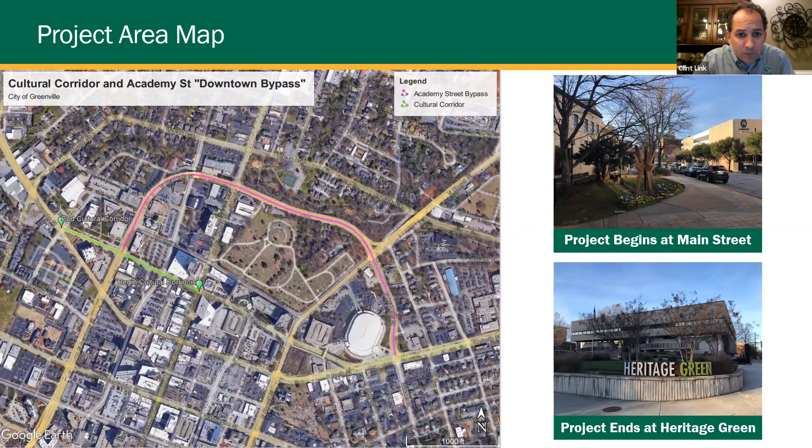So there's existing 4 lanes of travel out there right now. You can see sidewalks are pretty narrow, especially for a central business district - very narrow, very close to the road. There's not a lot of separation from the road to where the pedestrian realm is. There's no bike lanes on this - we don't have any accommodations for cyclists. That's totally unlike what you see on Main Street and some of the other streets in our CBD.

So we're looking to really enhance that pedestrian environment by doing some traffic calming, narrowing of the travel lanes, and reduction of a travel lane through a large part of this to create better separation. That's what we're going to show you tonight - where we are with the plans and how we're proposing to do some of this. So with that, I'm going to turn it over to Brett Helsel with HDR, and he's going to begin walking you through the preliminary plans for the project. Thank you again.

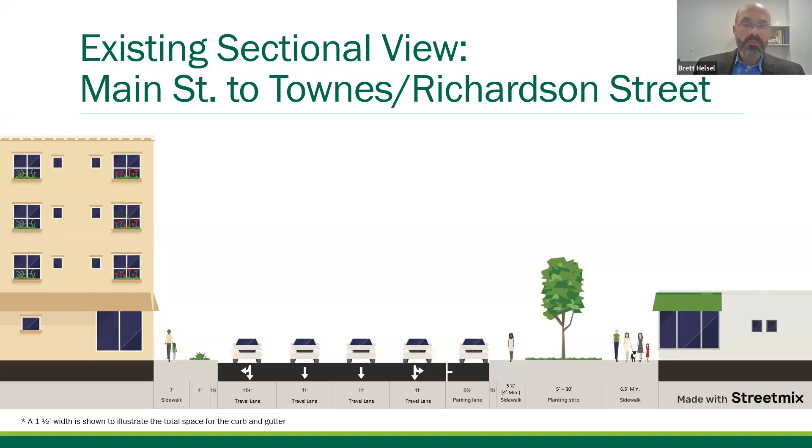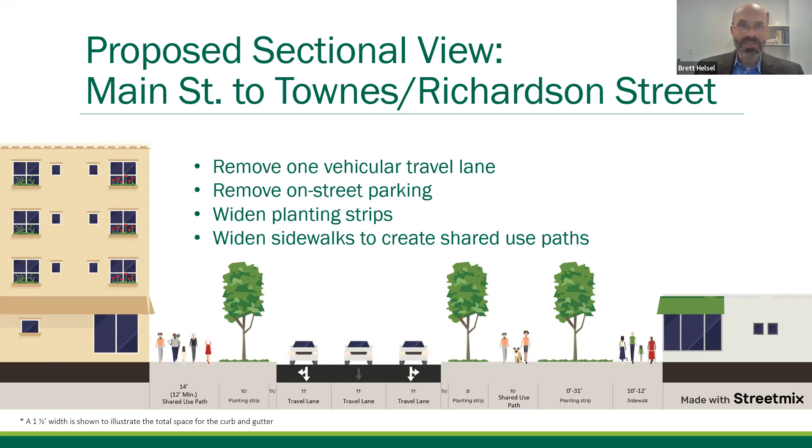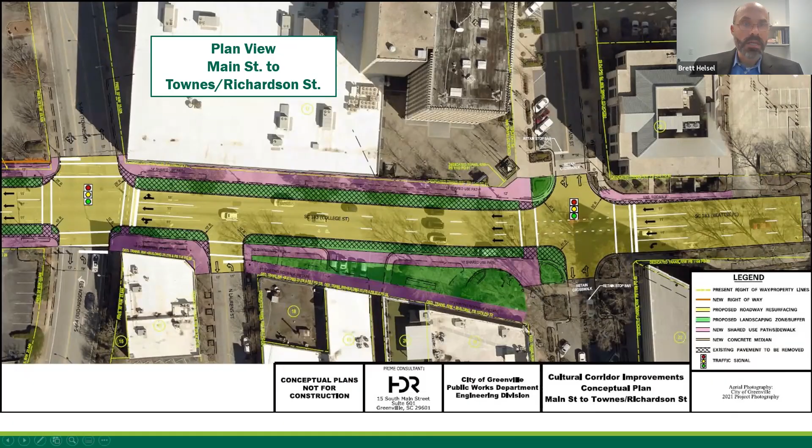So that covers the first block from Main Street to Richardson and Townes Street. I'm going to walk through the next block, from Townes Street to Academy Street. On this block we currently have a 4-lane section with a lot of extra pavement width—13-foot wide lanes, which is excessive for what this road needs in a downtown core like this. So we're going to reallocate some of that space to provide more room for pedestrians, bicyclists, and landscaping. There are sidewalks on this stretch today, but they're quite narrow and insufficient for the use needed on this corridor to promote walking and biking.

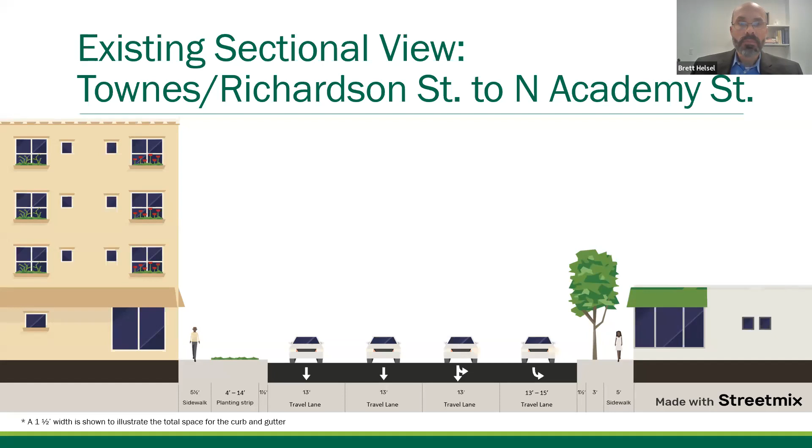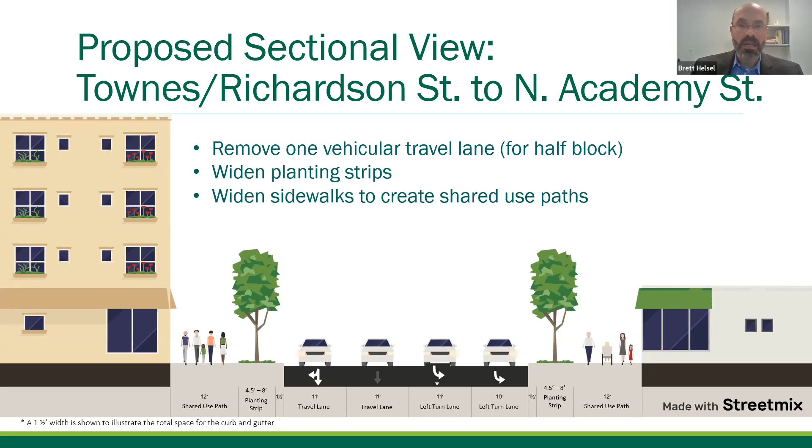The next slide will show you how we plan to convert this section. We would reduce those travel lanes down to 11 feet. For half of this block you'll have 3 lanes, and we'll pick up a 4th lane to add a left turn onto Academy Street. This has been generated due to the high traffic demand for left-turning vehicles coming downtown and needing to get onto Academy Street to go south. We're also looking at widening, providing a 12-foot wide shared use path on both sides of the street, as well as a nice planting strip and buffer. The next slide will show you what that looks like in aerial view.

Clint also mentioned some alternatives that we're going to present, which I'll do in a moment, but I wanted to share that this slide shows 4 lanes approaching Academy Street. Both of those alternatives are going to require 4 lanes. We've been coordinating that with the State Department of Transportation. We've looked at the traffic analysis, and the volumes there are pretty heavy, using that as both a through and a left turn movement onto Academy Street. This kind of shows you what that would look like—you'd have much wider sidewalks as you come up to Academy Street. I'll talk more about the actual intersection and what's being proposed with those two alternatives on the slides I'll share next.

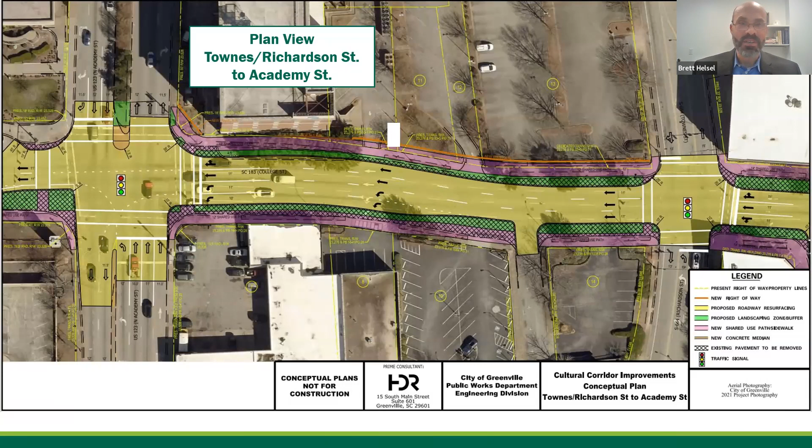So we'll go one more block, from Academy Street over to Heritage Green Place. The project is proposed to actually end at Heritage Green Place and Whitner Street, which is where the entrance to the public library is on Heritage Green. Not a whole lot of changes proposed here. Today there's a pretty wide sidewalk in front of the museums, and there's a bus loading zone for school buses to drop off, which will still be part of the proposed plan. There are 4 lanes for cars, and that's not needed on this section of road. There's also a sidewalk today on the other side.

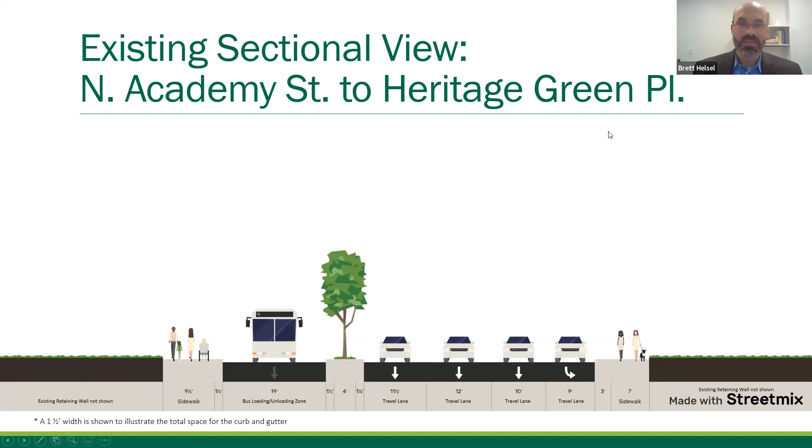We'll present the next slide, which will show how we're proposing to change this area. The area in front of Heritage Green would really stay quite the same—you'd still have the loading zone there—but we would look to eliminate that 4th lane and make this 2 lanes as you access from Academy, turning into a 3rd lane.

One challenge we have with College Street and 183 is there's a lot of traffic that comes from Academy and tries to head west out of town. It's a major route for vehicles leaving downtown. So a lot of traffic now leaves on College Street, which turns into Buncombe Street to the west. The Buncombe Street intersection is very heavily utilized, so we need to develop that 3rd lane to allow vehicles to store up and await the traffic lights during peak hours.

So these are the plans for this section. We would widen the sidewalk on the right-hand side and create a 10-foot wide multi-use path, as well as a wider planting strip by taking away some of that pavement. The next slide will show you that in plan view.

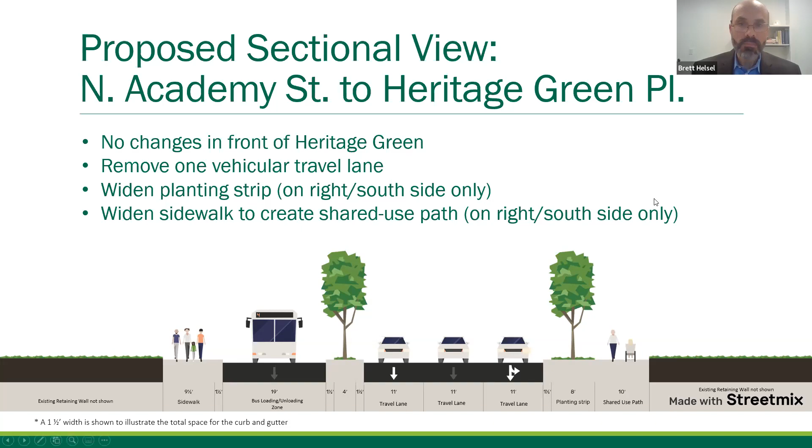So as you can see, the green area is basically where that fourth lane currently exists today. That would become an additional buffer area. There's already some landscaping there at the redevelopment of the tower, which is the Canvas Tower project. This will be a great opportunity to create some more green, some more landscape interest opposite the museums.

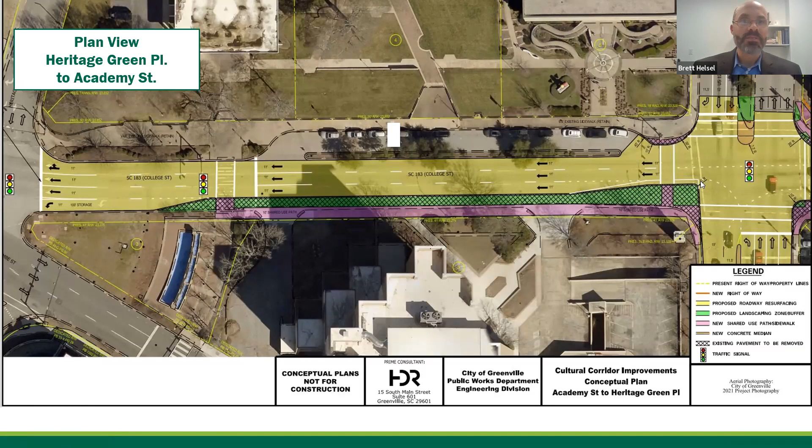And create a really beautiful corridor as you come through in the Heritage Green area. All right, well, that's the corridor. Let's talk about a couple of alternatives we're looking at Academy Street and present these ideas to you. This is the intersection. We're looking at two options right now.

As I mentioned, the traffic's quite heavy coming down College Street as well as on Academy Street itself. So this alternative one would have two lanes that are required to turn left from College Street onto Academy Street. That's a little bit of a change from what's there today. Today, you can be in the second lane and actually continue straight through the intersection. So that's one idea that's changed here. You would have two lanes that continue across.

And the benefit of this is really for pedestrians and other users that want to cross this intersection. You can see with the green and the cross hatching, we will be narrowing that crossing on College Street significantly on the west side of Academy, or the left side of your photograph there. So that crossing becomes much shorter, which is great for pedestrians crossing over to the Children's Museum. The crossing on the right side will also become shorter.

Another great benefit of this alternative is that you end up having what's termed a protected crossing on the south side of Academy. Today, that crossing is dangerous. It's difficult to cross because you have to merge traffic that's turning left from College onto Academy Street. It's supposed to yield for someone in a crossing situation, but it's difficult for them to see people, and it's difficult for people to see both lanes of traffic turning, especially when that second lane can continue straight today.

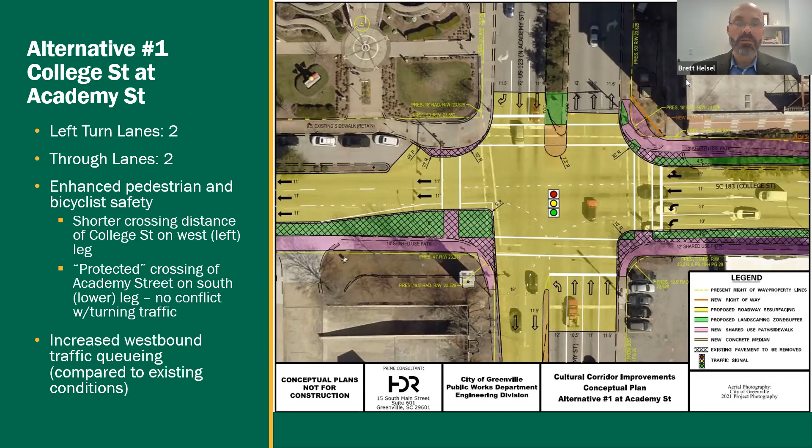So let's look at alternative 2. Next slide, please. This slide is really not a whole lot different as described before. You're not going to have two left turns that turn together from College Street. That lane will stay kind of like it is today, where you can continue straight or turn left.

One way to help mitigate this—you would still have an unprotected crossing on the south leg of Academy Street—but one thing we could do is look at what's called a leading pedestrian interval, where we signalize the ped crossing early before we give a green light to traffic. That gives pedestrians a chance to start their path across the street, become more visible, and get at least partly across before any cars begin going on the green light.

Again, this option's not as enhanced for pedestrian safety, but it does still reduce the crossing distances. It reduces the vehicular widths on College Street that you have to cross, and it still has the raised island on Academy Street to allow for a pedestrian refuge.

So these are the two alternatives we've looked at, and the traffic congestion on this alternative would be very similar to the current condition today with the four lanes coming from the east, traveling west.

We looked at several other ideas early on. Again, we're trying to balance the needs of traffic while also making this a safer corridor for pedestrians and bicyclists. Both of these streets are South Carolina DOT streets, and all of these ideas have to be coordinated with DOT to get their blessing to move forward with these designs.

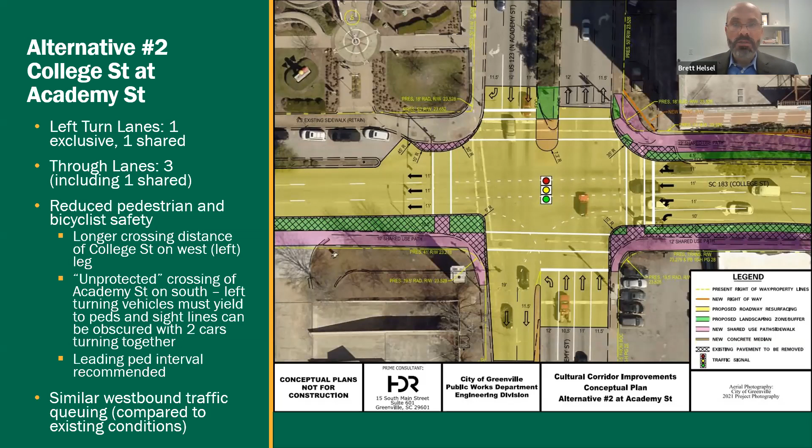The next section of our presentation is to discuss Academy Street itself. We mentioned early on that the city is looking at ways to make Academy Street function better as a bypass. If we can get some of that traffic coming in from the east and from 385 to not go through downtown, that would benefit everyone walking and biking on this corridor, or just traveling around the local downtown area.

So we've identified some areas where we may look at doing improvements to help that traffic use Academy Street more efficiently and promote it instead of coming into town on College Street. At this point, I'm going to turn it over to our traffic expert, Graham Malone, and let him lead you through these spot improvements on Academy Street.

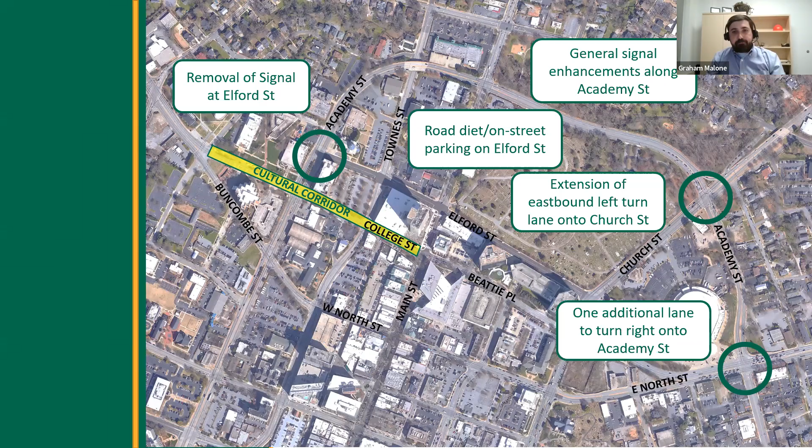I mentioned the signal at Elford at Academy is a candidate for removal. If this were to be removed, what would be left over would be an accessible right-in and right-out intersection. If you were on Elford Street approaching Academy, you would have to stop at a stop sign, and your only option would be to turn right. There would be a raised median extended along Academy to control movements there.

Going back to that slide, you can get a sense just looking at the closeness of those two signals - the signal at Buncombe and the signal at College, and then the signal at Elford today - those are three signals that are very, very close together. When you have that, and the volumes that you see on this type of road, it's only natural to get some of that spillback that's happening today. So the opportunity to take a signal out is one that should be explored, and that we are exploring.

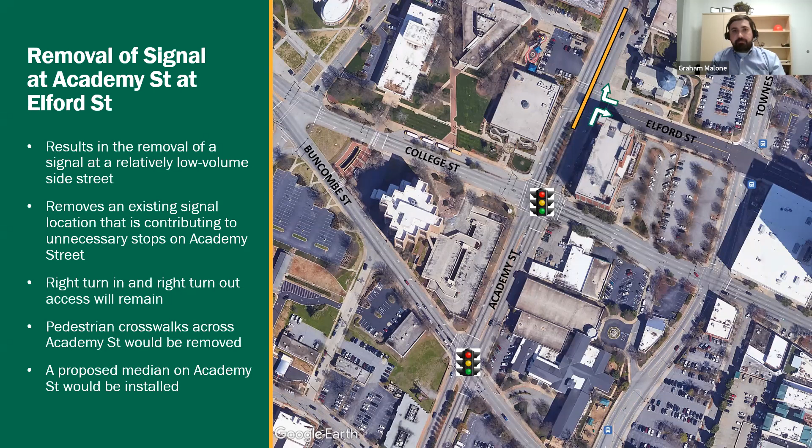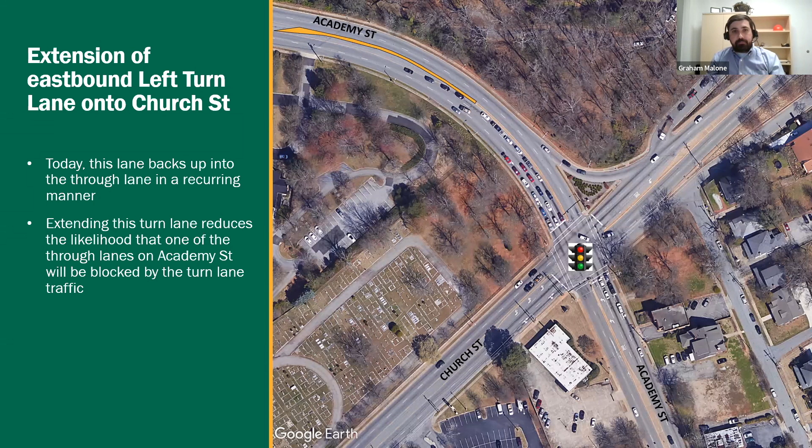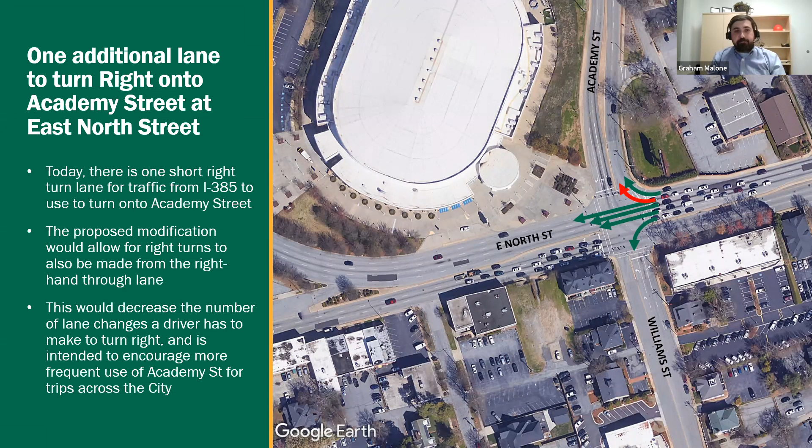And so at this point, I'm going to turn it back over to Nick DePalma, and he's going to run through the cultural corridor improvement timeline. Nick, I'm not going to rush you, but I am going to rush you, and say if you can walk us through the timeline fairly quickly, we've got a lot of great questions that I want to make sure that you and Clint and the consultants have time to answer.

Yes, thank you, I can run through this pretty quick. So everybody, I just wanted to go through the schedule pretty quickly, show you guys what we're thinking as far as timeline and when we can get started. So we're going to phase this project into two distinct groupings.

One grouping would be the actual work on cultural corridor on College Street. The other group would be the actual Academy Street improvements. So the cultural corridor piece, we think we can have final design probably fall, winter of this year, and we would be aiming to begin construction in spring of 2023. So that's kind of an accelerated timeline, but we think you would start seeing construction around that time.

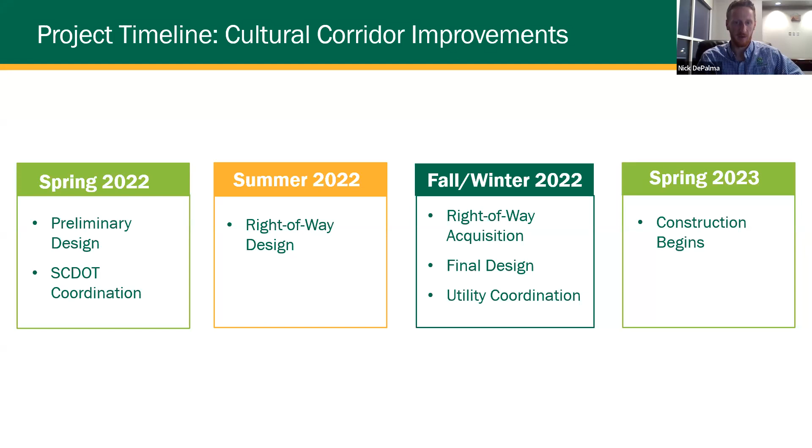In the meantime, we can go to the next slide. We would be going ahead and working on some of those improvements along Academy Street so that we can begin construction there in the fall of this year, so that it can precede our construction on the cultural corridor. That allows us to give cars a route to go around downtown before construction potentially starts on cultural corridor and on College, so that during construction, if we have a lane closed for construction or whatever it might be, there's a logical route on Academy to get around. We'll move on to the next slide.

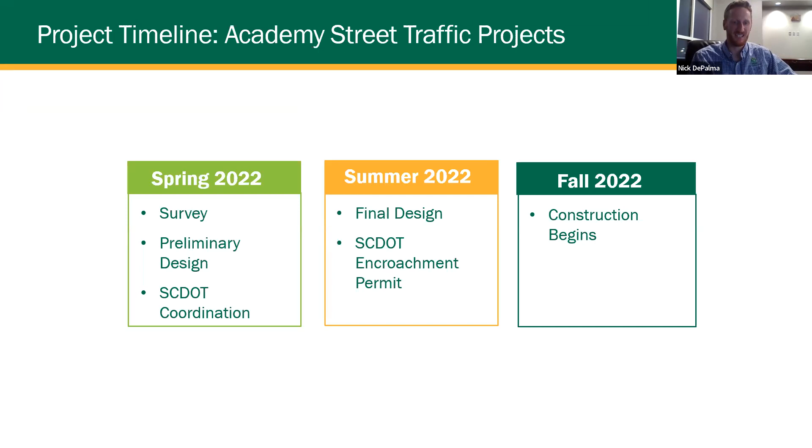Look at that, questions and comments. Okay, so I'm going to start backwards on a couple of these, and feel free, anyone here, to field these comments as we go. This one just came in, but it was asked earlier as well: a question about why we decided not to extend this all the way to Atwood, Butler, that direction, and what the thoughts are on that being part of a future phase to continue this a little bit further.

I'm going to call on you if you don't choose to answer. Nick, it looks like you get this one. So the main goal of this project was access, pedestrian and bicycle access and mobility from downtown, from the heart of downtown, to our museums and everything at Heritage Green. So yes, the other access is important, and we'll continue to look at it just like we do all of our other projects. But this specific project, the main goal was access to those museums, and that is also why the project stops there.

Yeah, because really looking to be this key connector and a safe connector between downtown and the museums and that sort of thing. So there was some concern, obviously, about the methods in which we are trying to improve pedestrian safety. Some concern we've seen from folks here that the white walk signal wouldn't necessarily be enough to make that safe. Some folks asking, did we consider a pedestrian bridge instead?